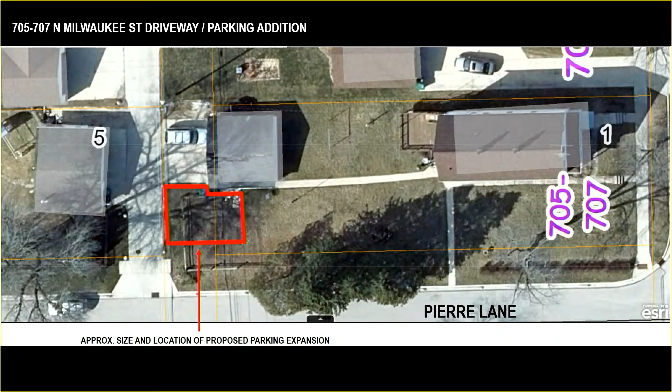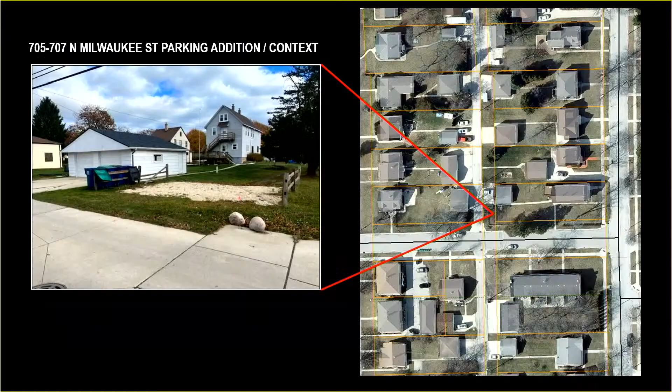As the commission is aware, the zoning code empowers the commission to grant a special exception to various sections of the parking code. In this case, it would be allowing for a wider drive approach than what is otherwise permitted, and also an expansion of the parking beyond the setback. As a corner lot, there is a front setback equivalent, which is 20 feet, and this would be exceeding, going into that setback.

The applicant states that the garage overhead is too low for larger vehicles and wishes to install the extra parking to avoid stacking of cars to the tenants. It's a duplex, so there's a 4-car requirement for that.

The criteria that the commission can use to grant the special exception is in your packet, but real quick as a reminder I'll read it: the special exception will not have an adverse effect on surrounding properties by reason of noise, dust, odor, appearance, or other objectionable factors, nor will it create a nuisance, substantial negative effect on surrounding values, or interfere with reasonable enjoyment of the properties. The mayor mentioned my recommendation to approve, and I have 3 conditions of approval that the commission can consider.

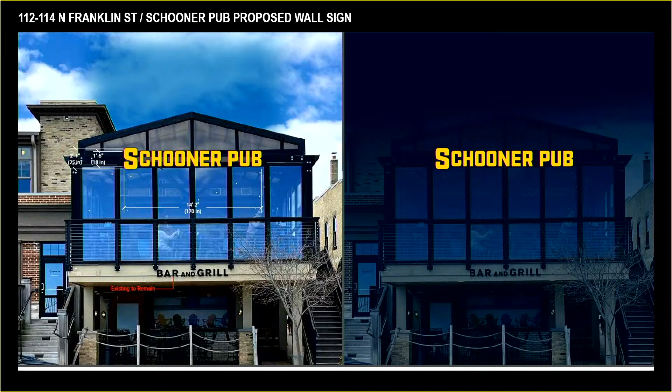Is there anyone willing to make a motion to accept the variance? I'll make that motion. There's a motion by Alderman Newmeyer. Is there a second? I'll second it. Seconded. Any questions or concerns on the motion? Seeing none, all in favor signify by saying aye. Aye. Opposed? All right, motion passes.

Brings us to number 6, final plat consideration and possible action on a final plat for the Hidden Hills North subdivision, located north of Astor Street, south of Green Bay Road, and east of Indigo Drive. Bielinski Homes is the applicant. Staff recommends approval of the final plat, subject to final review by the city engineer.

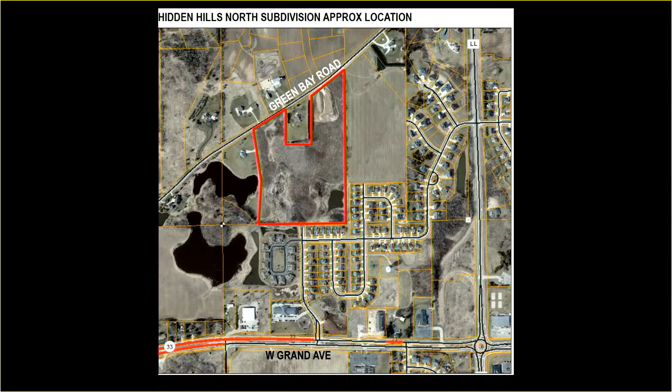Staff finds that the final plat is substantially unchanged from the approved preliminary plat and is consistent with the comprehensive future land use plan. Staff recommendation is to approve, subject to final review and approval by the city engineer.

Roger, question? No questions. Oh, I'm sorry, your mic was on. Oh, I'm so sorry, I've become specially tuned to the red button. Any questions on this? Anyone willing to make a motion?

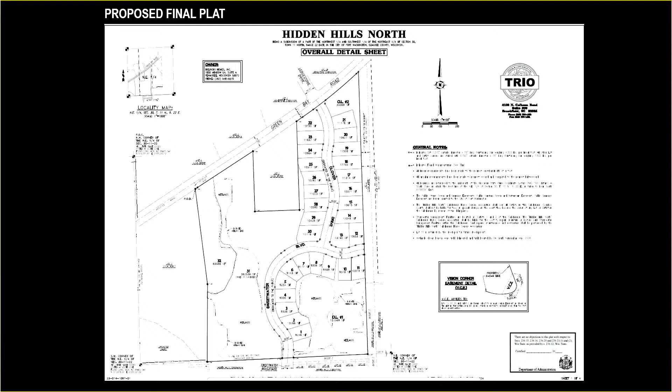I'll move approval. Motion by Commissioner Ehrlich. Is there a second? Just a clarification that it's with Bob's recommendation. Yes, I'm sorry, yeah. I'll second that. So the motion is to approve this with the recommendation from the city planner. Moved and seconded. Any questions or concerns on the motion? Seeing none, all in favor signify by saying aye. Aye. Opposed? Motion carries.

Number 7, condominium plat. Consideration and possible action on a condominium plat for the Hidden Hills North subdivision, located north of Astor Street, south of Green Bay Road, and east of Indigo Drive. Bielinski Incorporated is the applicant. Staff recommendation is approval of the condominium plat as presented.

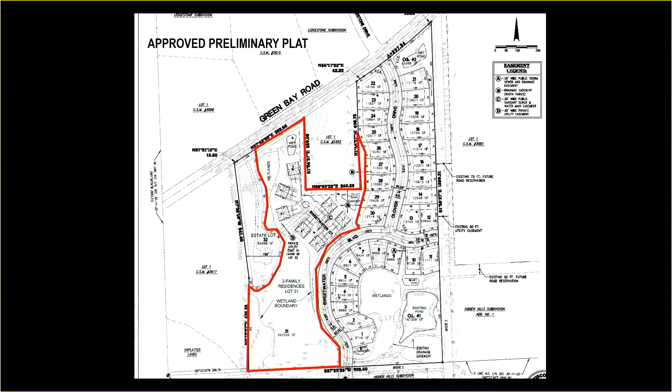Related to the previous matter, this is the condominium plat portion of the Hidden Hills North subdivision. Here again is the approved preliminary plat from 2021, with the red outlining the condominium portion of that plat. It is a total of 7 two-unit condominium units, and this is the Hidden Hills condominium plat that will require a recommendation from the Plan Commission and final approval from the Common Council.

As noted, staff recommends approval — the condominium plat is substantially unchanged from the approved preliminary plat and is consistent with the future comprehensive land use plan. With that, staff recommends approval, and I would add the proviso of final review by the city engineer.

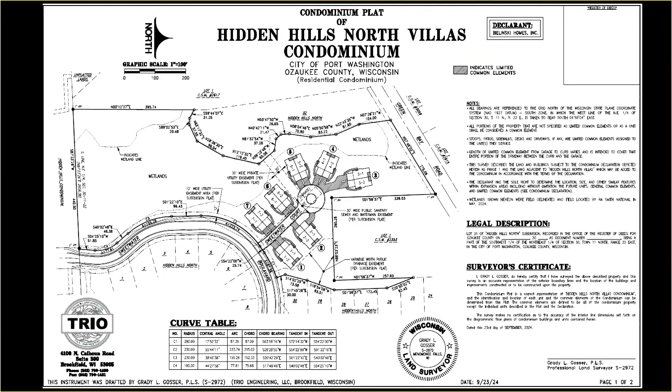Any questions for Bob? Anyone willing to make a motion to accept the recommendation from staff? I will make that motion. Moved by Alderman Newmeyer. Looking for a second? I'll second it. Seconded by Roger. Any questions or concerns on the motion? Seeing none, all in favor signify by saying aye. Aye. Opposed? Motion carries.

The next is a plat approval, consideration and possible action to approve a Wisconsin Department of Transportation real estate plat and relocation order for the State Highway 33 overlay project, located on Portview Drive south of Highway 33 and adjacent to 1329 West Grand Avenue and 1407 West Grand Avenue. Wisconsin Department of Transportation is the applicant. Staff recommendation is to approve the real estate plat and relocation order as presented.

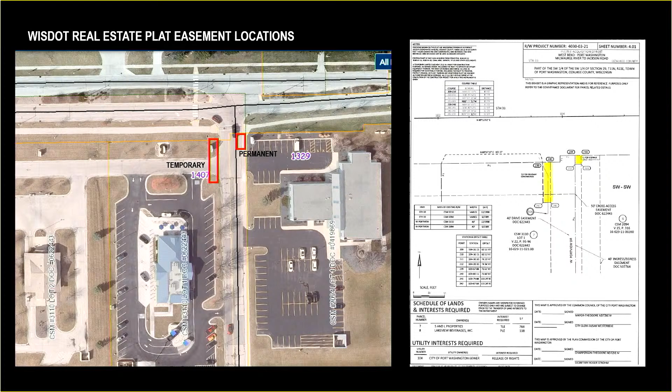Why do they need that? That's such a small area for the overlay. Well, that frontage road in front of Culver's is not a public road, so they're going to be on that road during construction, so they need temporary access for that purpose. Then they're doing a little work with that ramp, which also isn't on private property.

That sidewalk is where they need a permanent easement. They aren't going to make that a controlled intersection, are they? With a light, no. Thank you.

Any other questions? Anybody willing to make a motion? I'll move approval. All right, we've got a motion for approval of the relocation order and overlay project. Is there a second? I'll second. Seconded by the esteemed city engineer. That's going to stick, Roger. Any questions or concerns on the motion? All right, seeing none, all in favor signify by saying aye. Aye. Opposed? All right, motion carries.

That brings us to number 9, building site and operation plan, consideration and possible action on a proposed automotive repair business at 702 West Grand Avenue. Lindham's Real Estate is the owner and TM Family LLC is the applicant. The recommendation from staff is approval of the building site and operational plan as presented, with the following conditions.

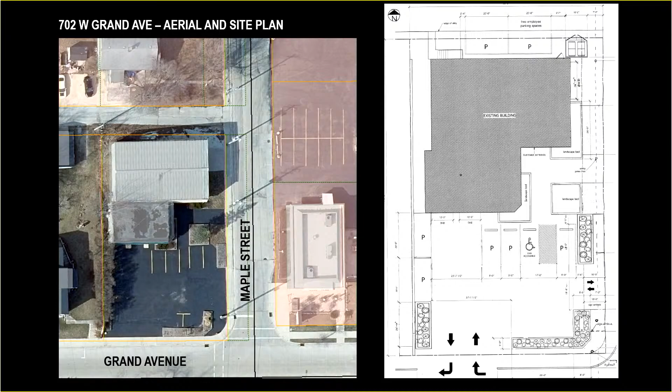I do, I'm going to start with you, Mr. Harris. The applicants can come up here if you'd like. The first question is, with the Design Review Board, what was the thinking without any exterior improvements to the building or site, outside of the condition maintaining the landscape beds, since it's unchanged? Outside of signage, which is done in-house, there was really nothing to review. It was the same as what was approved back in '18 and also in 2021, when the owner came back requesting a different site plan, but the commission stuck with the 2018 plan.

Okay, and was there any conversation about signage? I may have missed it. There will be signage, I believe it's going to be on that area next to those overhead doors facing Grand Avenue. Right, so on the building? It'll be on the building, yeah. Okay, and do you plan on selling any vehicles there? No, we do not at all. All right, that's all I needed to know. Any other questions or concerns?

No, actually that was one of my questions, the selling of vehicles. So I'm glad to hear that we're not selling vehicles on it.

I'll move approval with the staff's recommendations. So there's a motion to approve with the recommendations of the staff, the landscape beds and no outside storage. Is there a second for that? Second, seconded by Alderman Newmeyer. Are there any questions or concerns on the motion?

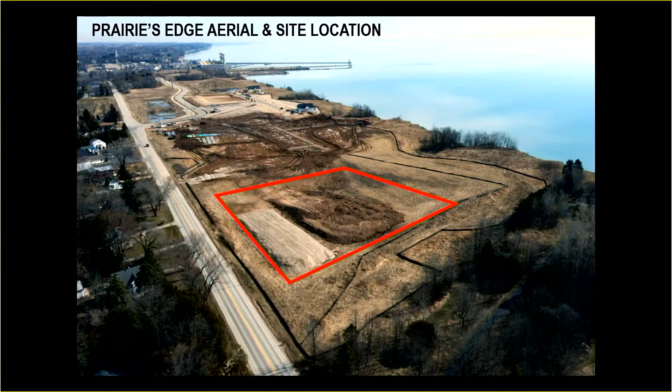I do have greater aerials, but at this point I'll let the project architects give the commission a summary and review of what's being proposed here. I might add, you also have the handouts in front of you.

Okay, wait, are we ready? Clicked on the wrong PDF. Hold on. Of course, it's the one that takes a little longer. Crashed.

All right, Joe Galbraith with Galbraith Carnahan Architects. Do you guys require an address on the record? No. No, go ahead, doesn't matter.

Yeah, we'll find you. So we're working on the south end of the site. Obviously, a lot of work has gone on this site already. Many of the buildings are in place. So what we're presenting here is very much in keeping with the spirit and the design intent of the rest of the development.

But it's just a slightly different type of product here, more of an elevator condo building so that people with more limited mobility can have a condo type of unit that would contrast some of the other condo units that have stairs or multiple levels.

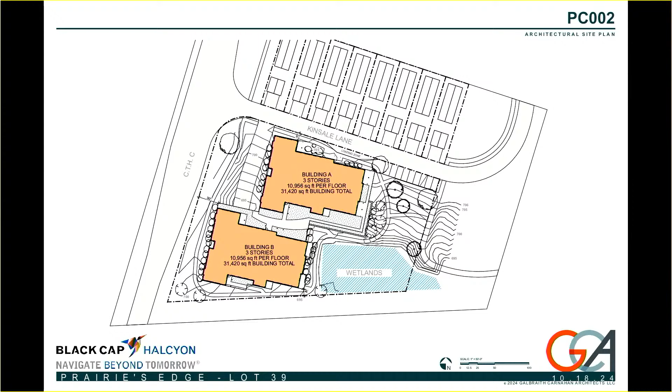It's all non-combustible concrete frame parking deck, with wood frame buildings above that. Each building is 3 levels, with 6 units per floor on floors 1 and 2, and on the 3rd floor it goes to 4 units, so those top-level penthouse units can be larger, more premium units. Those units on the 3rd floor that face east have larger roof decks with very nice vistas of Lake Michigan.

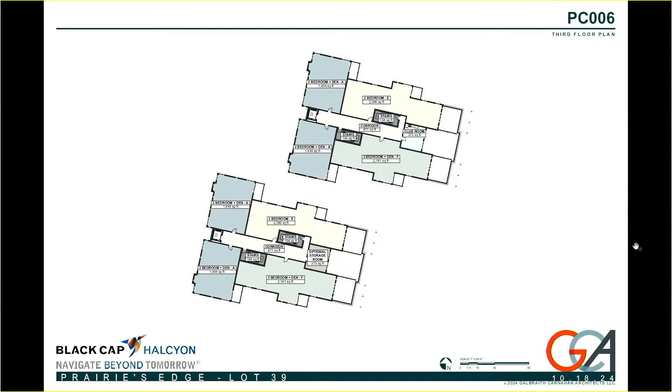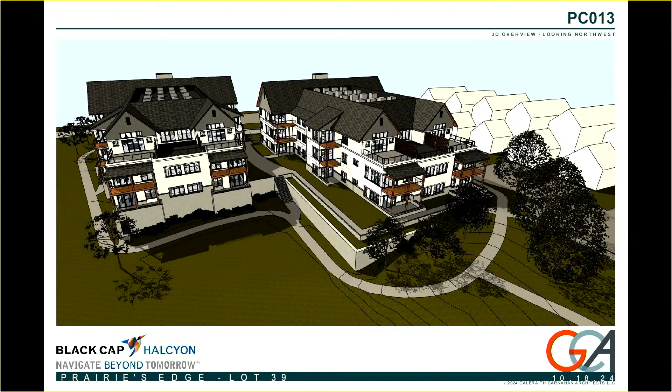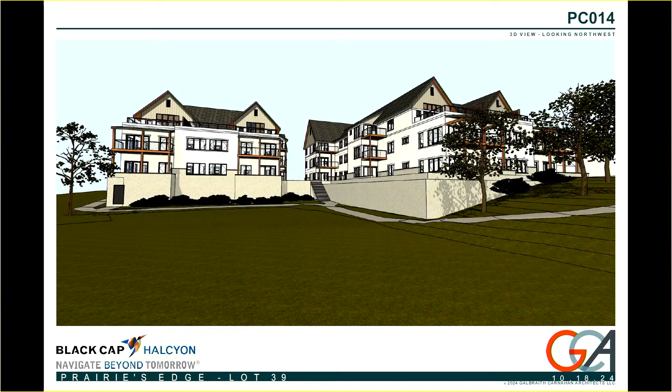There will be landscaping, not yet completely flushed out, that will encircle the building and exist on the plaza. The buildings themselves will have white lap siding with accents of corrugated metal and some cedar plywood acting as a soffit material, which is also found on some of the existing bluff homes.

This is a nice view that shows some of the detail of the materials. You can see the base course of natural stone veneer that will come up to engage with the windows, then the lap siding. The lap siding has a nice alternating repetition, not just a straight 6-inch lap, but 6, 6, 4, so we develop a bit of pattern. There's also some trim banding at the third floor that breaks it up even more.

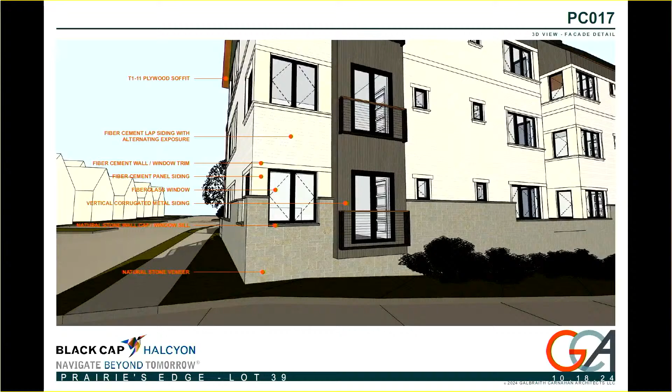Here's a representation of some of the materials: the shingles on the left side, the wood soffit material, the corrugated metal, stone, and the windowsill, which would be a comparable stone or cast concrete type product where the windows occur. The windows themselves would be black fiberglass.

They would be casement windows. Some of the other buildings in the development have double hung, but casement was a more appropriate style for this building. Performance-wise, those windows develop a better seal because this is a very windy site, and on a day like today with a lot of precipitation and higher winds, it's good to have that nice locking seal on the windows.

Some of the comments made during the architectural review related to the windows. One thing we looked at as a team was adding window muntins—our initial submittal didn't have them, but we've added ones compatible with some of the other buildings in the development. There's also some detailing that will set the windows back 2 inches to develop more depth in the facade.

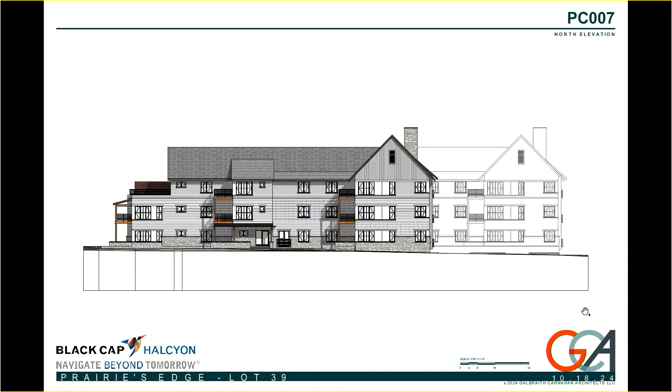So the other question I have, I'm not sure if you can answer it or if it's more for Bob: with the higher density buildings moving to the south, does that change the site plan? Because we've got a large building in the middle of that overall development site plan. Let me pull it up again.

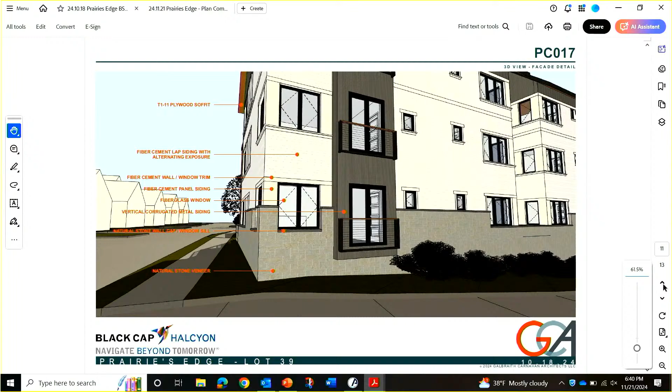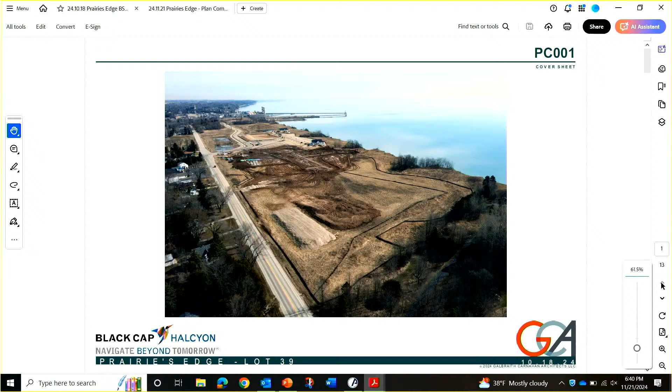Keep going back. There's like a 96 unit in the middle of that thing, that kind of big brown U-shaped thing, the luxury apartment. Is that still going to be there, so our density is actually getting more? Yeah, that's still planned.

If you take a look at Prairie's Edge, it's kind of bisected north-south by Sheeling Lane, which bisects the development east and west. So on the west side of Sheeling you have the larger footprint buildings and multifamily developments, and on the east side, more towards the lake, are the single-family homes. That's the general layout of the development.

As far as the density goes, the development agreement had contemplated up to 48 townhome condos. This puts us at 42 with Lot 39, and the apartments down there have always been part of that. We just had Lot 39 as kind of a holding place — we weren't really sure exactly what we were going to lay out there. We looked at a couple different designs for the condo layouts, different building configurations, and settled on this one.

I actually really like the design, and I think it's a good spot for it on the overall site. I've always been a little nervous about the larger 96 unit luxury apartment building, and I was hoping this would take some away from that, but I understand what we're trying to do and where we're getting to.

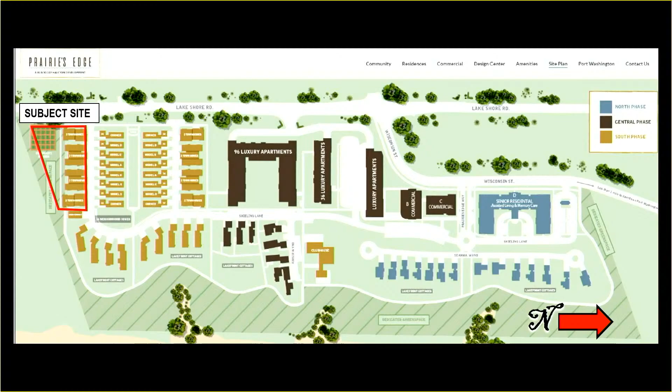I just had a couple quick questions at this early stage. Are these going to be exclusively owner occupied? Yeah, these are for sale. But in the HOA, will they be able to do short-term rentals? No. Our plan from the very beginning was to be in a very long-term hold position with the apartments and commercial properties, so they would effectively be competing with us if we allowed that, so we don't.

Otherwise, I really appreciate this and I love the project. Thank you. Any other questions or concerns?

Just to comment, I have reviewed the stormwater calculations for this new development, and they conform with what has previously been done for the site. Good, thank you for that.

The staff recommendation is to approve the building site and operation plan subject to final civil plan approval by the city engineer. At Design Review Board they recommended approval of the building — there was some discussion about adding muntins to the windows and about cedars, and the architects did submit those elevations shown a couple minutes ago. So the recommendation for a motion, if you so desire, is to approve the building site and operations plan allowing the elevations presented at tonight's meeting.

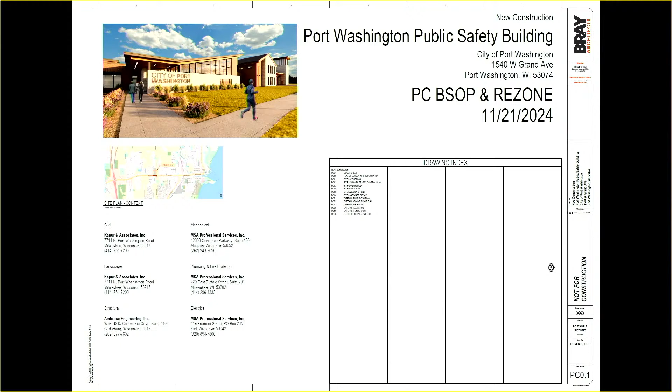So the building is a police and fire facility, with police on one side, fire on the other, with shared city amenities in the center. We have a large complex garage on each end, with a lot of office space in the center. But the shared area, which is training and a lobby that can be used for multiple things, gives us a midpoint where we can bring this building together. I think you'll see that in a lot of the renderings.

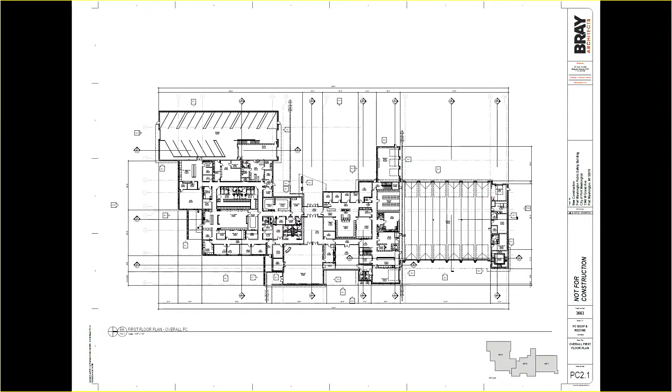But to start with the site, we're a corner site, a very prominent site. We do have a large apron coming off of the fire portion of this building - that's one of the most important pieces to this whole project. It is in a DOT access right-of-way, which the city is currently working with DOT on to make sure we can use that location.

That does bring the building quite close to LL, which I think helps us with this corner site - having a building at the corner and not having parking surrounding it on the main roads. So you will see we have an internal road being designed to go around the building, which allows us to break off fire and police separately. Police would exit onto Grand, while fire would exit onto LL.

We do have a wet retention pond in that prominent corner that will remain wet year-round. We have a few other bioretention areas to the west that would be more planted and wouldn't be wet most of the time.

We do have a little bit of a grade change from the sidewalk up to the building, so you'll see stairs heading up to that secondary entrance. But the main entrance really is in what I'd call the back of the building, the west side, where the main parking is located. That is a very prominent entrance.

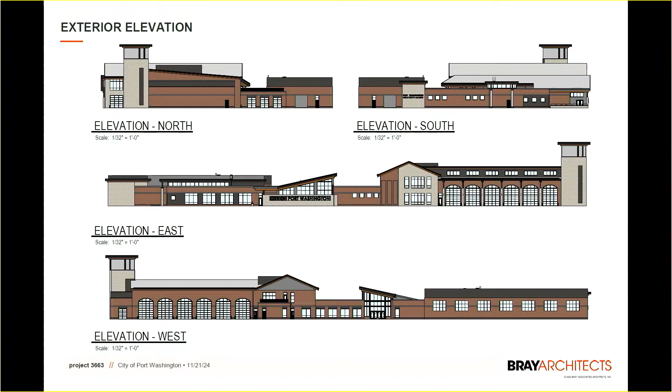Well, I think it's a nice looking building. I really like the LL facade. I kind of feel like, and this is maybe deliberate, but the Grand Avenue side feels almost much more nondescript and almost forgotten about, which to me is the entry to the city more so than LL. I feel like that south elevation, we could have done a little bit more. You've got these really nice brackets and overhang that come out over the garage door. If we could work some of that detailing into that south piece, that might help it a little bit.

You talked about the stone kind of anchoring. Looks great on that LL side, but on the south side, I don't feel like we got that anchoring. It kind of feels like that one lone piece of stone, and that's all we really have other than those two columns. Yeah, we didn't do ourselves any services by showing this rendering, because it really is a lot more complex than it's showing.

It's also a very dark rendering. You're not seeing a lot of what you're seeing in the other renderings, unfortunately. There really is a lot of height to that clerestory that goes above the police roll call room, that's not something you're really seeing pop up out of that. That's going to be well lit at night. We do have a lot of windows on that facade. I mean, obviously it's an office area, so there's only so much we can do.

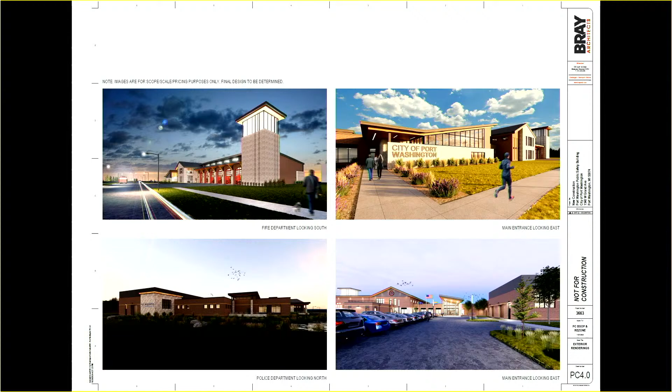But I think that stone piece really is pretty massive. It's 24 feet tall at the garage, because that squad garage is rather tall. It's hard to really get the actual scale of this thing. I wish I could zoom around like we've been doing with the PD and fire department and show you a little bit more how that actually looks. But with these stagnant pictures, it's a little harder to get that. I could get some new pictures out for you guys if that helps.

I get you, I agree with your point. The very cool side of the building is facing east on LL, and there's a significant amount of traffic. I'm wondering if through signage and landscaping that south elevation side could be shifted around. Until you pointed that out, we've got the really nice City of Port Washington signage on the east elevation facing LL, but on the south elevation, where thousands of people drive by every day, we've just got a smaller imprint. I think if you could find a way to do it without increasing costs, that would be good.

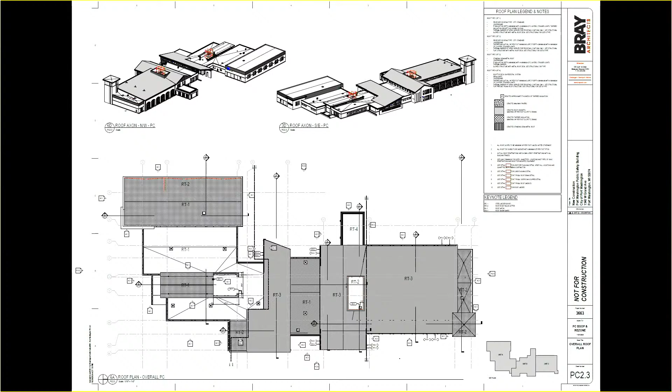I think the other thing you're not seeing in that rendering very well is the wet pond. What you're not seeing very well is that wet pond and all that landscaping. If you look at the landscape plan, you can see a lot more of the trees. There is going to be a lot more life to that side than you're actually seeing in that rendering. There's a lot of ins and outs. Again, the pop-up wasn't showing up very good in that rendering.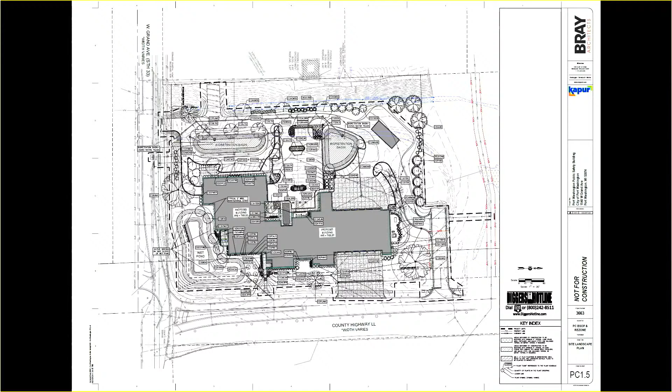I think it would make sense for me to get you guys some better renderings of that corner. I can give you a card, and if you can just send me a rendering, I'd love to see it. Otherwise, I think it's a beautiful building. It's got some really nice features to it, and I think this is going to be a great addition to the city.

Oh, there we go, I got a rendering. All right. Any other questions? Feel a lot better, Roger? Yeah, really nothing more site related.

Can you tell me what's driving the size of that middle parking lot? Right now that's about 45 spaces total. The training room itself would probably drive that, but anyone else coming to police or fire beyond that, there's really no other places to park because of the current location. LL and Grand have no parking anywhere near there. We're really not going to be able to park on our new road because it's a 24-foot wide road.

I think we're meeting the standards of parking, and a little bit over, only because we have additional spaces for police and fire to park. So that's really the only public parking anywhere near here. And if you guys hold, there's going to be voting here, there's going to be judge, you have municipal court here, and who knows what else in the future. So that's really, I think, what's driving that larger parking lot.

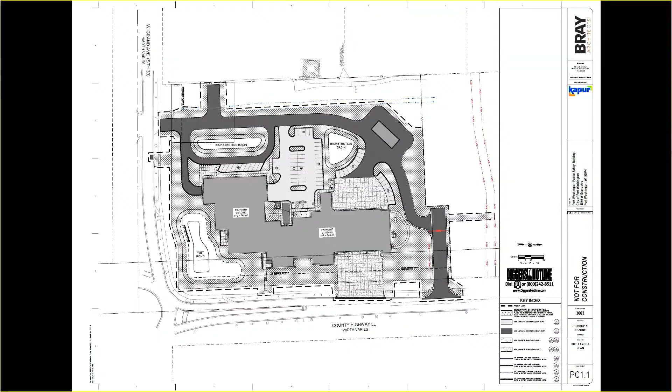I also think the two of you will have an opportunity to review that, as this approval is subject to our esteemed engineer's final work there. So I think that's good foreshadowing.

The mayor did show me a rendering of that south side, and it looks much better. I think the rendering here in the packet is not the best. No, it has birds in the sky, though. It looks very nice. It really does help to have that entourage that we didn't have in that other rendering.

Any other questions or concerns? Otherwise, I really appreciate the diligence on the project, the collaborative work that went into designing this entire thing, the input of the police and fire department, the executive teams as well as their teams, and the city staff that participated in it. It was a pretty strong group approach, which I'm very grateful for.

And I never get to make any motions at council, but I'm going to make the motion to approve the staff recommendations for the building site and operational plan, subject to the final review and approval of the city engineer. Is there someone willing to second that?

I would add the other motions under the recommended motion. Oh, I'm sorry, as well as the other motion. Yes, I amend my motion to the recommended motion. I'll read it: I move to approve the subject building site and operation plan subject to the following conditions: 1, final civil approval by the city engineer; 2, city ownership of the subject site; and 3, rezoning of the subject site from B2 business to PUL, public and utility lands; and any additional conditions as determined by the commission, which there were none.

Are you willing to amend your second on that? I am, sir. All right. Any questions or concerns on the motion? Seeing none, all in favor signify by saying aye. Aye. Opposed? All right, motion passes.